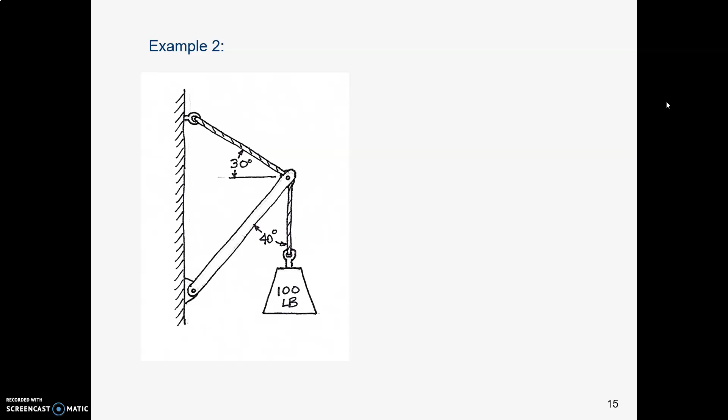And if the weight in the rope is pushing down on the bar, this bar is probably in compression. It's probably feeling pushed on. So now we want to get out our free body diagram analysis tool, very important, and forget about everything else that's going on, just that one joint. Focus in on that joint.

By the way, this is going to be exactly the same method you'll do when you're analyzing a whole truss. You get your analysis tool here, your paper towel tube. You don't look at anything else except one joint. Forget about the rest of it. And you just work one step at a time. So here we are on this step. There's our joint that we're focusing on. Who cares how it's connected to the wall? Doesn't matter. We're thinking about the forces in the rope and the bar.

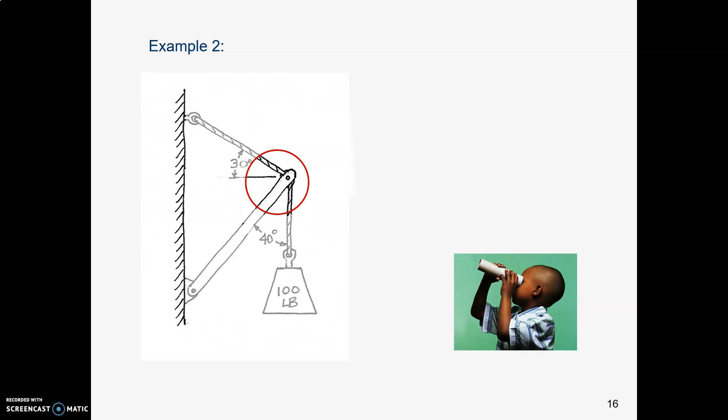And we're thinking that the rope hanging down is in tension, so that arrow is pulling away. We're thinking that the rope up above is in tension, so that arrow is pulling away. And we're thinking that this support bar must be in compression, so that arrow is pointing towards. Well, we know one magnitude. We know that the downward force is 100 pounds. So we can draw that arrow 100 things long.

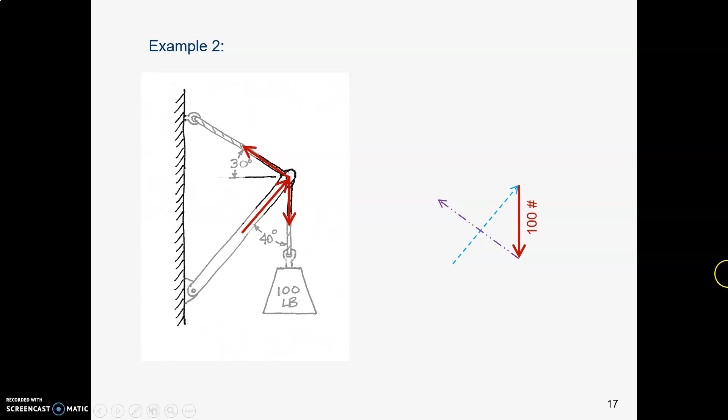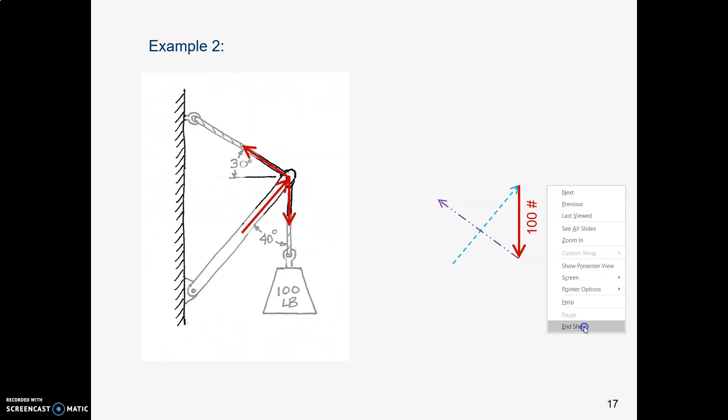Now the others, we don't know their magnitudes, but we do know their angles. So we could draw the upward arrow for that bar, and we could draw the outward, pulling away arrow for that rope. So there are our three things, and we could now measure how long they are. And now, oh yeah, I wanted to say, sorry, let me go back here. This relates to the second problem that you're going to work on. I meant to say that.

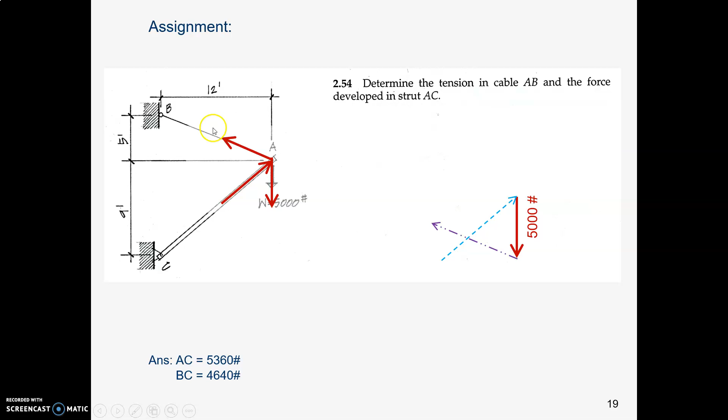Here's our free body diagram of that joint with tension pulling away and compression pushing towards. So we can draw one thing 5,000 units long. This bar in compression pushing towards, we don't know the length, but we could draw the angle. And this cable pulling away, we don't know the length, but we could draw the angle. So now,

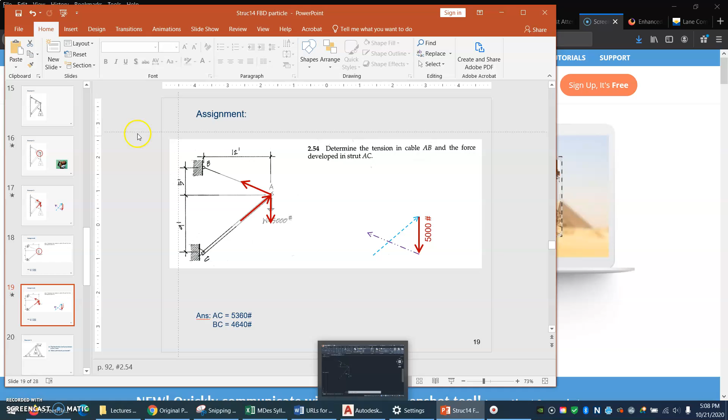let's go over to AutoCAD and look at our example number 2 here, which is similar to our second homework problem. So here is our example number 2. We've got a 100-pound weight hanging down, a bar at a 40-degree angle off of vertical, and a cable at a 30-degree angle off of horizontal. One thing you need to watch out for is, are you going 40 degrees off of vertical? Make sure you are, and don't go 40 degrees off of horizontal. And then over here, are you going 30 degrees up?

So again, I'm feeling spiffy because I made fancy polyline arrows at the end of my lines. And now I'm going to leave my free body diagram where it is so that if I do mess something up, I still have my original to return to. And I am going to copy my 3 arrows, but not my dimensions. I don't want the dimensions, I just want my arrows. And I'll move a copy over here. Hello, I don't want a dimension. I want to delete that.

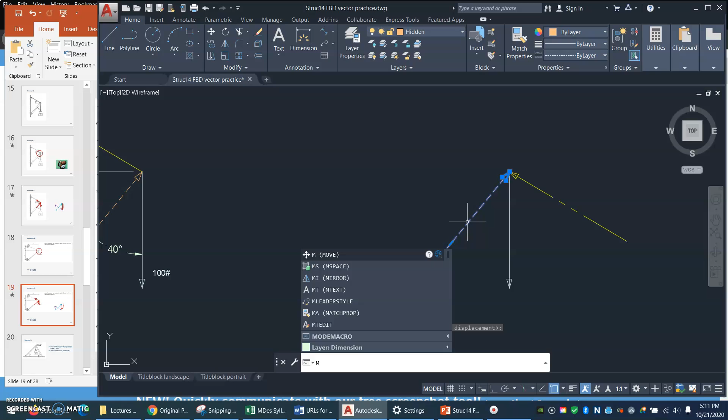Let me undo that and show you something else first. I could also, what was I going to say? I could also, if I wanted to, do a different kind of tip to tail. I could move this tip to that tail and then move that tail to that tip. I'll still get the same answers. These guys are still at the same angles, and I'm still going to get the same lengths. I just did them in a different order.

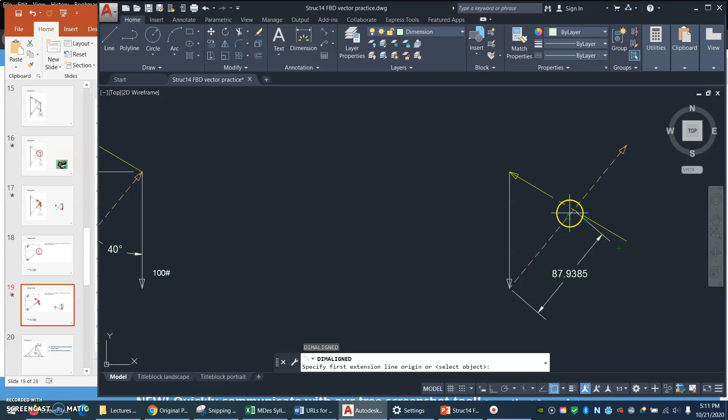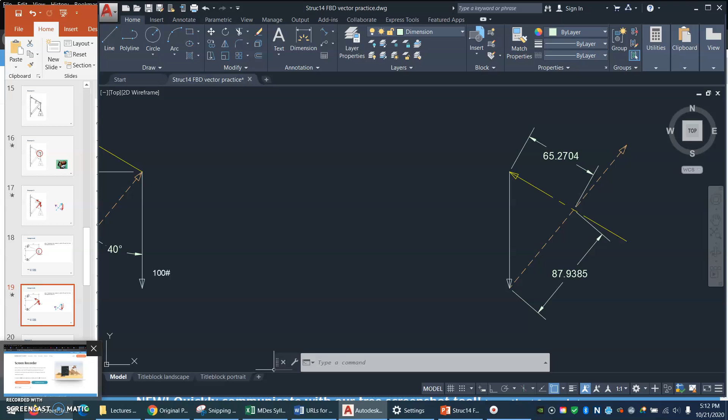So I would now come in here and measure. That's 87.939 pounds. And this one is 65.27 pounds. If I'm going to leave my dimensions, I would go in here and add a pound sign, because we want to make sure we know what the units are. Okay, I think that takes care of that one. In the next short video, we'll come in and look at the third problem.